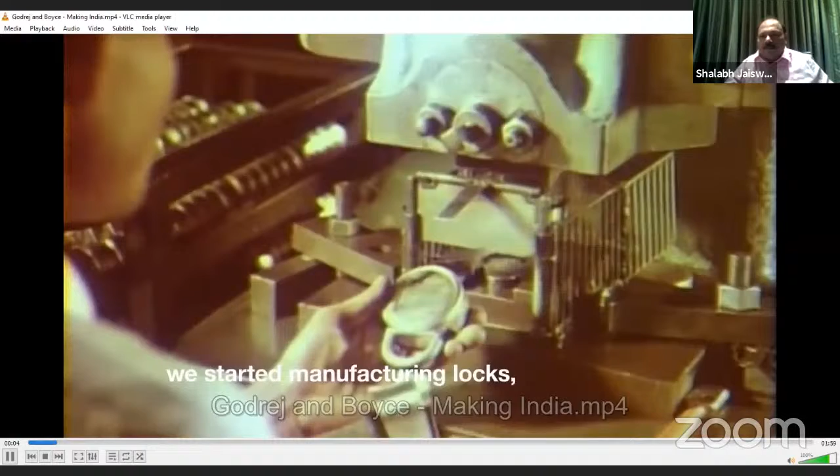In 1897, we started manufacturing locks. We weren't just making in India. We were envisioning a self-reliant India.

When in 1920, we manufactured soap from vegetable oil, we weren't just making in India. We were showing the world a humane way to meet human needs.

When in 1951, we built India's first ballot boxes, we weren't just making in India. We were partaking in India's journey towards becoming the world's largest democracy.

When in 1955, we made India's first typewriters, we weren't just making in India. We were contributing to the nation's mission of propelling women into the workforce.

When in 1958, we made refrigerators, we weren't just making in India. We were supporting the movement of freeing women from the kitchen.

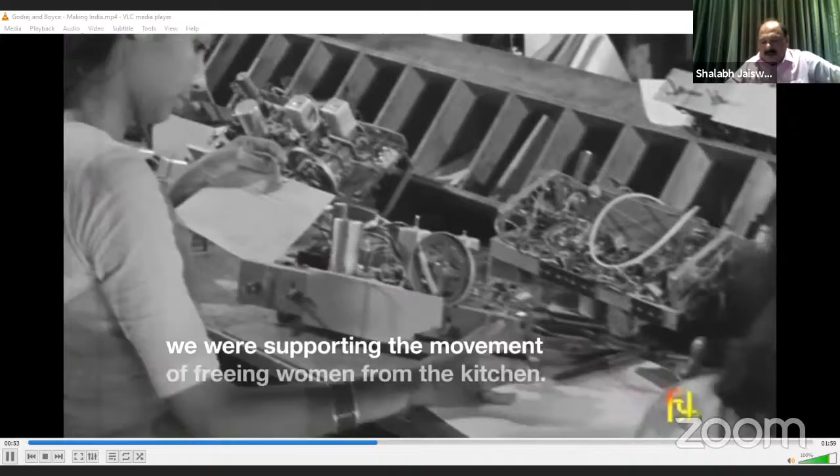When in 1984, we introduced mosquito repellent mats, we weren't just making in India. We were contributing towards making India free from vector-borne diseases.

When in 1991, we started making products that sustainably increased crop yields, we weren't just making in India. We were doing our bit to help farmers double their income.

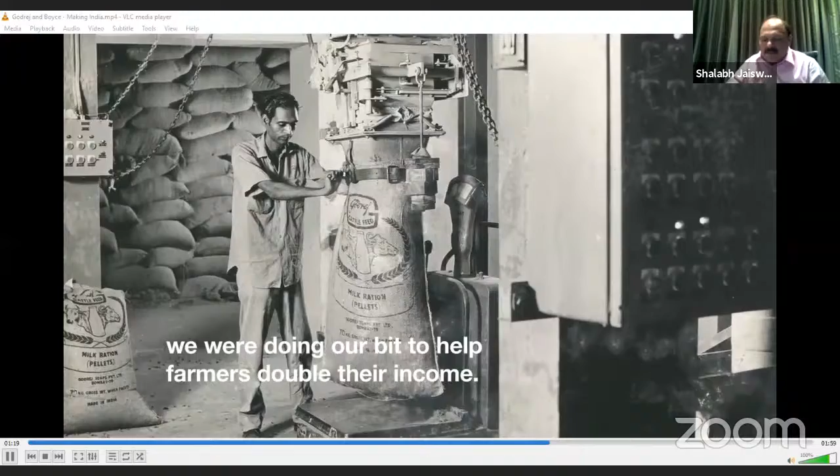When in 2013, we made key components for India's first Mars mission, we weren't just making in India. We were participating in Free India's most glorious moment.

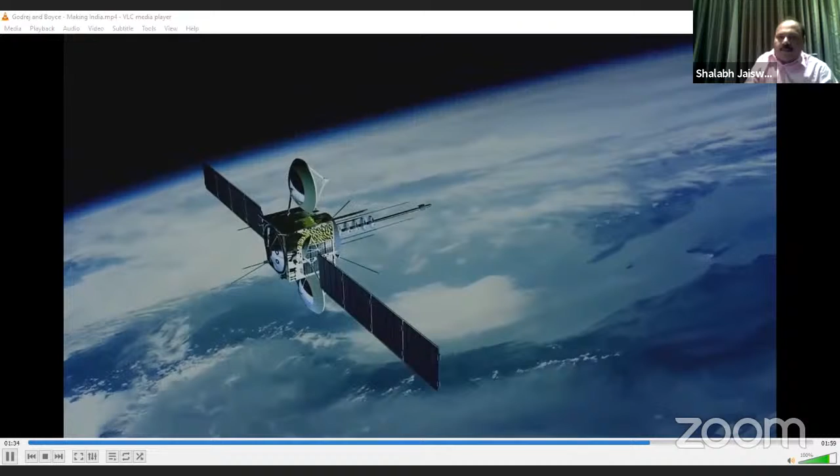For over 120 years, during the journey of our nation's independence, we haven't just been making in India. We have been passionately doing our bit towards making India.

The makers of the iconic brand Hindware, known for crafting exceptional bathing experiences and developing contemporary bathroom solutions. Brilloca offers you bathroom solutions that are state-of-the-art and trendsetters. With a combination of unparalleled performance, smart technology and awe-inspiring designs, Hindware Italian collection meets the new age demands of hygiene. With the aesthetic confluences of European brilliance that mesmerizes each distinction, Queo stands out for you. A design flow articulated for a sense of exclusivity.

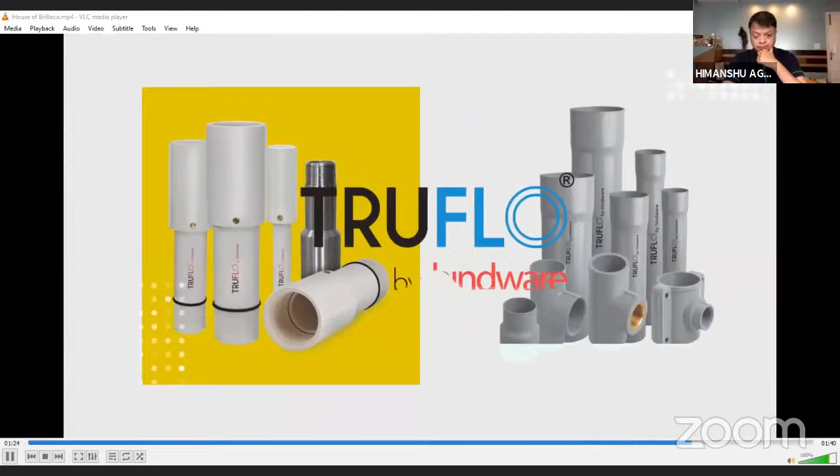That's alchemy. Opening new horizons in the space of tiles. Our avant-garde, futuristic brand Neom. Designed for aesthetics, functionality and durability, Benelave is the segment leader. There's Truflo plastic pipes and fittings to provide complete plumbing solutions.

We at Brilloca are constantly looking at the future and hence are committed to environment and sustainability. Brilloca, new name, same values.

As far as low VOC paint is concerned, how it has enhanced indoor air quality is the main topic to be discussed today. Before that, I'd like to share that our company is IGBC certified, ISO certified, and also holds CIDC and GRIHA certifications.

Before we discuss the benefits of low VOC paint regarding green home builders, as per the IGBC objective, it's important for builders and homeowners to understand exactly what VOC is.

VOCs are volatile organic compounds - unstable carbon-containing compounds that can easily vaporize. Once they enter the air, they react with other elements and lead to pollution. Breathing this polluted air can cause headaches, breathing problems, burning or watery eyes, nausea, asthma, and even cancer.

The EPA, the Environmental Protection Agency, has set some norms and limits on VOC levels, but the acceptable level can still be very high in some paints. VOC levels are highest during painting - the painter is the most affected person and needs to be protected by using low VOC paint. Even after the paint dries, high VOC content can continue to release toxins for several years.

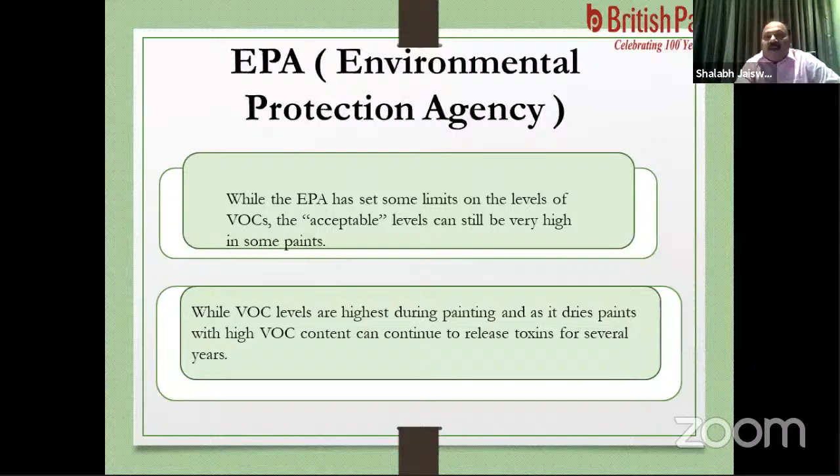This doesn't mean we shouldn't use paint - we all need to be concerned about using good quality paint with natural ingredients. If we go back 30 years, to our childhood in the 80s, people were using lime and cement paint - natural paints with no chemicals. But now the system and tradition has changed, and people are going for better quality, chemical-based paints.

These water-based natural paints give off almost no smell. They were made from natural raw ingredients such as water, beeswax, plant oils, resins, plant dyes, essential oils, and natural elements like clay, chalk, and talcum. That was the old tradition - there was no VOC, and it was very helpful. But as advancement has taken place, things are changing now, and we need to start taking these precautions.

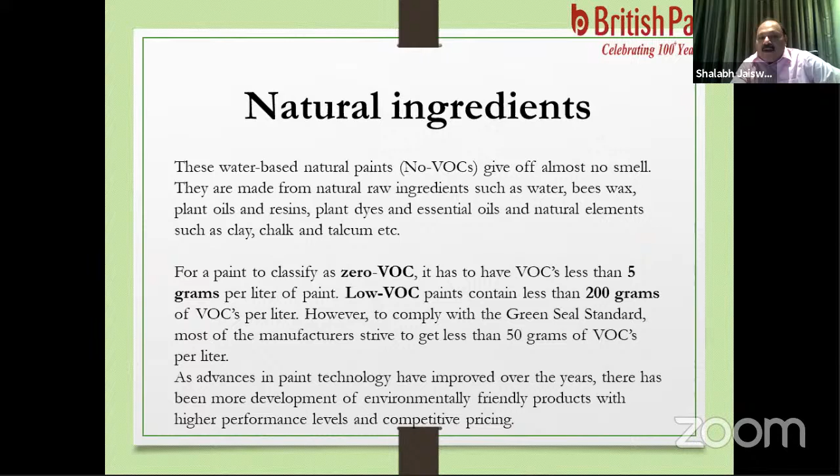As advances in paint technology have improved over the years, there has been more development of environmentally friendly products with higher performance levels and competitive pricing.

What is the psychology like? Normally consumers think once we are using low VOC paint, would it be costly? It is not like that. Low and zero VOC paints have come down in cost gradually over a period of time. Now the manufacturers, it is not very costly. It is reasonable because there are different categories like economy segment, medium segment, premium and ultra premium segments. So in all the emulsion segments, the company has started taking care of these VOC parameters. So people should not think that it would be a costly product. As for price and performance compared to the traditional one, it is okay.

Now, if we talk about eco-friendly, as Mala ma'am already told, air quality needs to be taken care of - how we can contribute. So for a more eco-friendly option, we can use low VOC paint, which is not only beneficial to the environment but definitely for your health also.

In buildings that especially need to maintain good air quality, like schools and hospitals - definitely in schools there are small kids, and in hospitals there are patients. So we definitely need to take care in those particular areas. It is crucial to use the most health and environmentally friendly paint, as indoor VOC has higher levels.

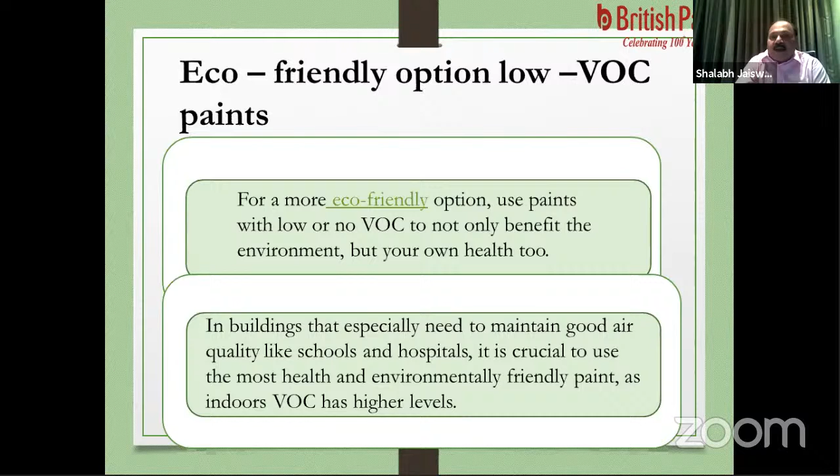There are definitely various other benefits also of using low VOC paint. Once you're using low VOC paint, it helps reduce the allergy causing toxins. It helps reduce the concentration of contaminants in the ozone layer as well as in ground water and landfills.

It is easier to clean with soap and water than other paints. For a common consumer, a lady definitely believes in maintaining her house. So once you're using emulsion paints and low VOC paints, it is easy - you can clean the wall very clearly with the help of a small, light detergent.

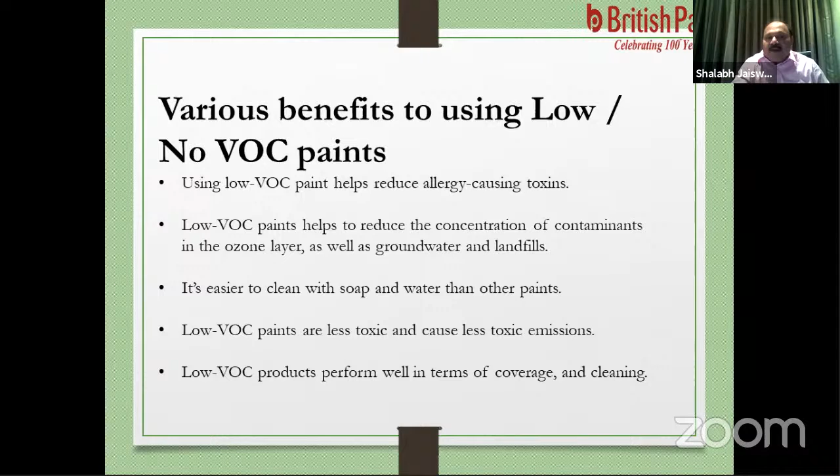As for other benefits of low VOC, these paints are less toxic and cause less toxic emissions. And definitely the coverage and cleaning also comes better. Coverage doesn't necessarily increase, but you will get reasonable coverage.

Cleaner air - if you use low VOC paint throughout your house, you won't have to worry about inhaling dangerous fumes during or after the painting process. Because after painting, you definitely have to live in the home, but during painting, the painter is the main person who is directly in touch with the paint, and during the painting process the emanation takes place. So from the applicator and painter's point of view, it is important.

Keep in mind that paints which release higher levels of VOC can cause a variety of health issues, spanning from aggravating allergies to causing permanent respiratory issues.

There was a builder in St. Louis who started as a green home builder - this is something they worked hard to eliminate in the homes they build. It means it is a kind of social service - to make a green building is a social service. We can say we are concerned towards society and towards the nation.

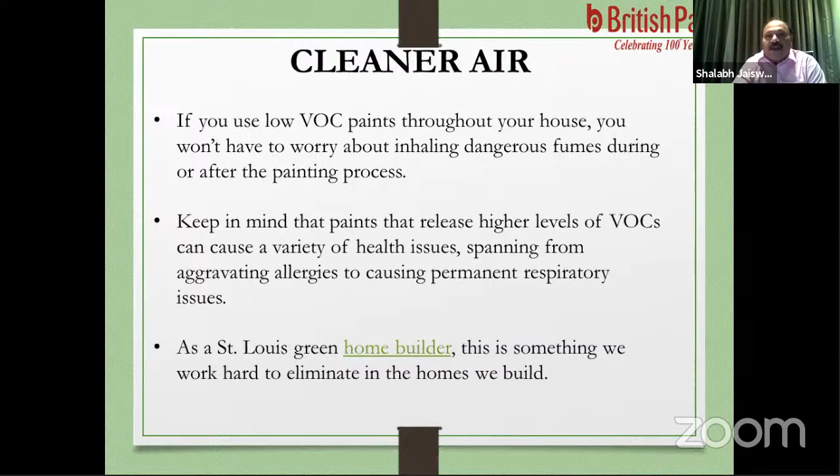Strong odors is also a matter. After painting and during the painting, the odors is also one of the factors which need to be taken care of. Low VOC paints help in that. Whether you are painting your luxury home yourself or having your green home builder, take care of it. The odor of paint can be quite an obstacle. Paint does not always dry quickly, and the chemical scent of paint containing high levels of VOC can prevent you from getting back into your home. With low VOC paints, the painting process is safer and you will be able to get back into your home quicker because the air will not be polluted with strong odors.

It is cost effective, as I told. It is a common misconception that low VOC paint will be far more expensive than the hazardous alternatives, but it is simply not true. Low VOC paints are very similar in price and can be found at your neighborhood hardware stores. You can pay comparable price for the safer paint, which means more money to spend on personal touches in your luxury homes.

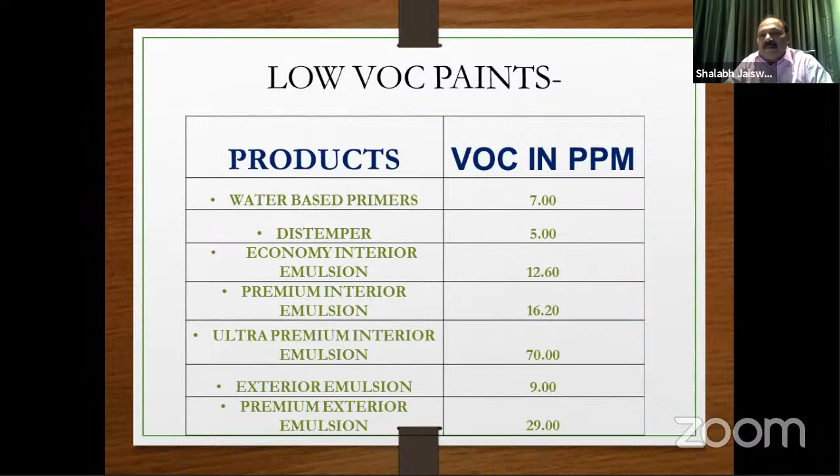Hi, good morning, and thank you, Mr. Jaiswal. It was really good to know that low VOC really helps in IAQ. But now pre-COVID times and post-COVID times have seen a great lot of difference. I was surprised to know that indoor air quality is 5 times more polluted than outdoor. So if Delhi is today talking about outdoor air quality being bad, just think about it, indoor air quality is 5 times more bad.

So let's hear it from one of the best possible persons, who is part of a company which is probably one of the largest air filter suppliers in the world, and they're into air cleaning and air filters. So whether it is HEPA or MERV 13, or what kind of filters we should look for, probably at least for metros and mini metros in India.

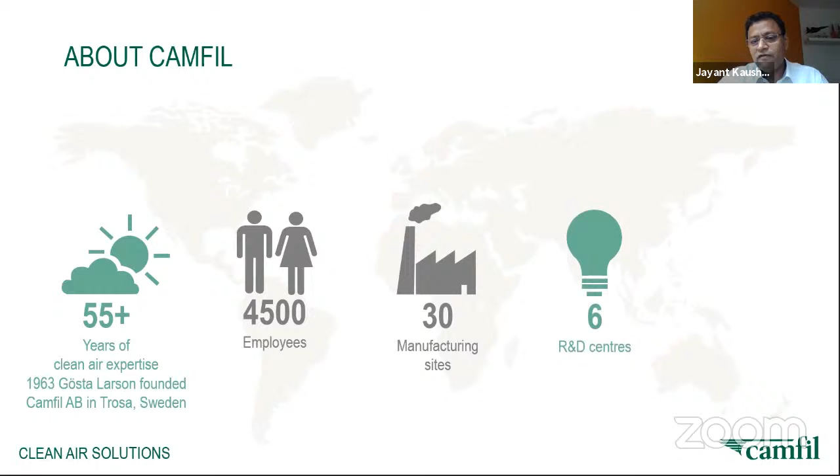We are not many employees, 4,500 globally, 30 manufacturing sites, 6 R&D centers, and we are coming from headquarters in Sweden, in Stockholm.

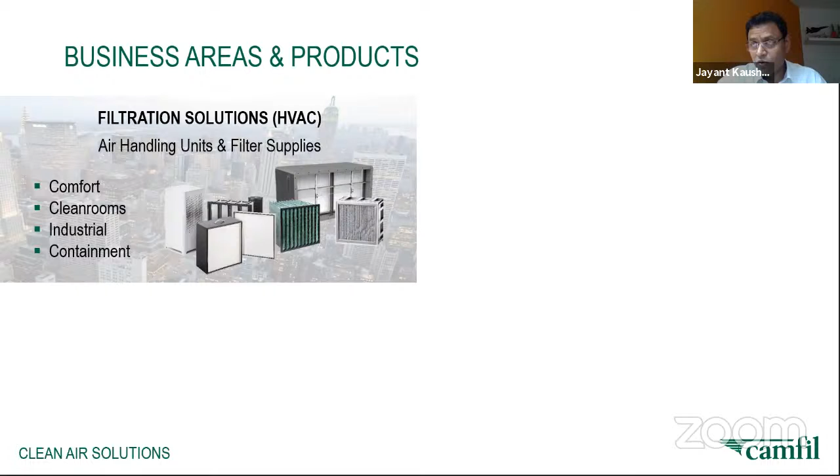In terms of business area, we have 4 business areas. In terms of filtration, we have filters for all kinds of air handling units, whether it is public building, comfort, clean room application, industrial application, or even containment. Containment means for places where you have to contain the gases from going out and you need to filter them.

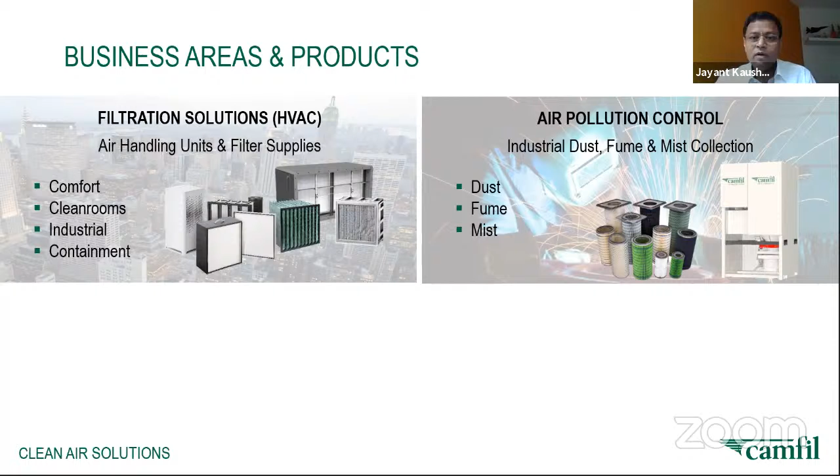Then you have something known as air pollution control, which is basically to take out the dust, fumes, and mist from an industrial application. So wherever you are creating a high degree of pollution while manufacturing, this is something which can collect the dust, take it out from the area where people are working, and separately accumulate it, and then it can be disposed of easily.

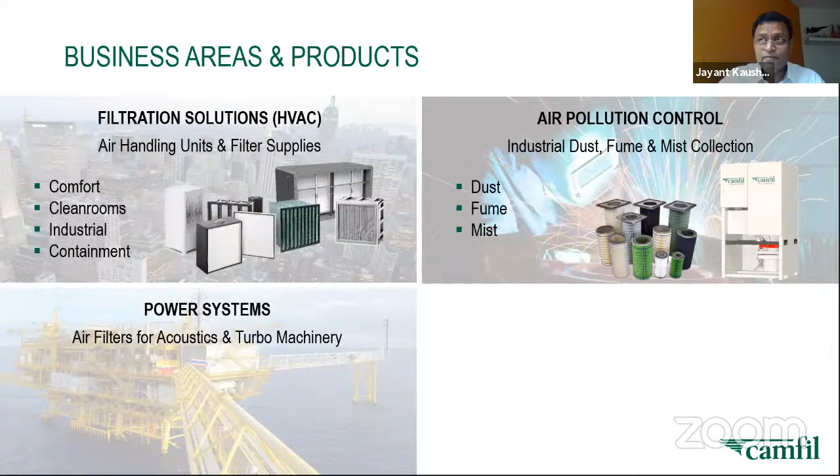Number 3 is power system, which is basically we make filtration for gas turbine units, so that the gas turbine unit can supply you energy at lower cost of ownership and without much disturbance in terms of frequent changes of filters or shutdown.

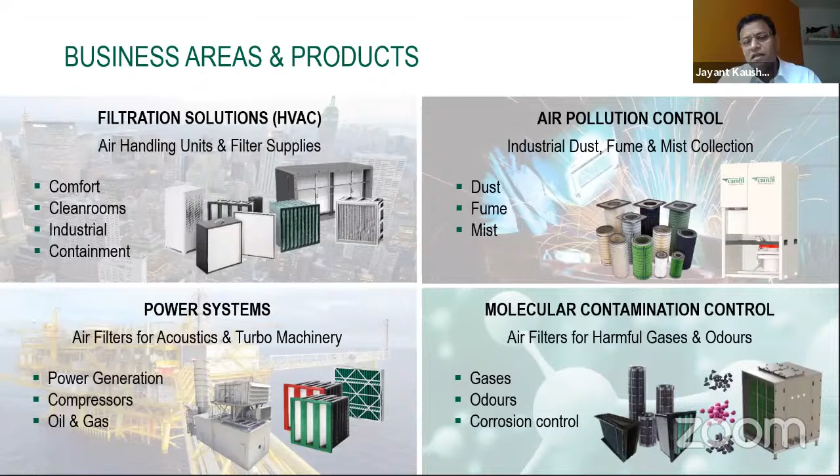Last but not the least, as touched upon by Mr. Jaiswal, is about molecular contamination. So we do have filtration which can take care of gases, odors, and corrosion controls. Gases mean NO2, SO2, VOC, formaldehyde, including ozone. So this covers the entire gamut of business, what we do globally.

Moving on to why we're talking about PM1 and not PM2.5. Let's understand this: the air we breathe is about, in reference to 1 kg of food we eat and 2 kg of liquid we drink, 15 kg of air we breathe. So it's much more.

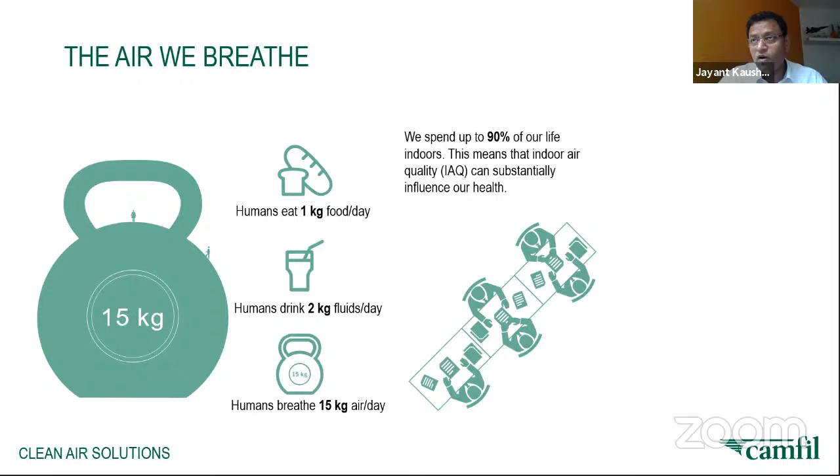15 kg is for a normal person who is normally walking. If you're running, or workers doing something very heavy, they obviously consume more. We spend about up to 90% of our time indoors, which means sitting in an office or home and breathing air which is possibly more polluted.

We all think that outdoor air is more polluted, but as per studies published by WHO, indoor air can be much more polluted—up to 50 times more polluted inside. That's why it is important to clean the indoor air.

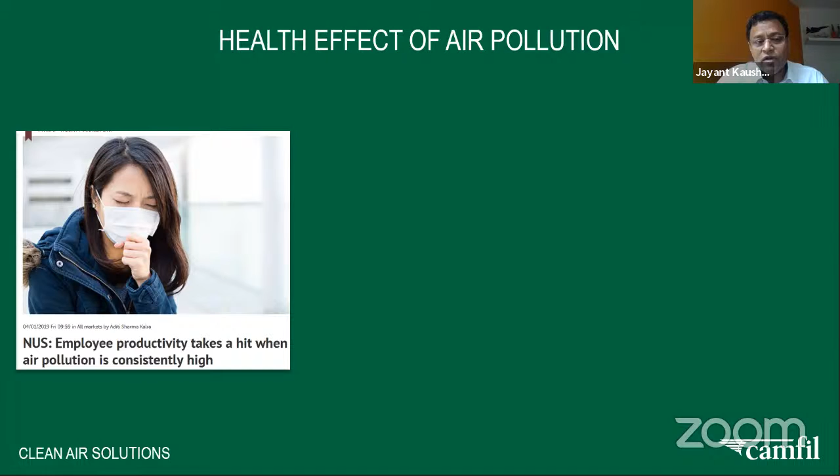Moving on to a few snippets on what is happening: a study done by the National University of Singapore says employee productivity takes a hit when air pollution is at a higher level. In China, a link between happiness and air quality has been established, meaning if pollution is at a high level, people feel they're not very happy.

A similar study done in the UK says when NO2, nitrogen dioxide, is high, people feel something is very disturbing—for example, feeling as if a partner is dying. That's the kind of sentiment one gets.

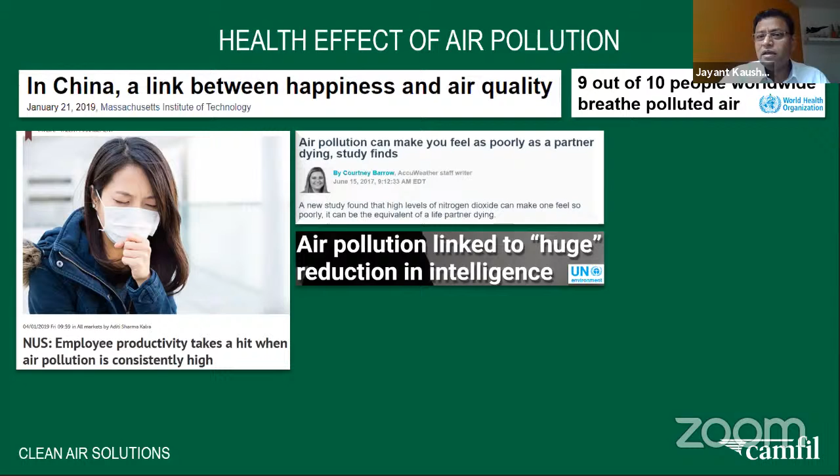Air pollution is linked to a huge reduction in intelligence. So air pollution is not only affecting our respiratory system, it goes beyond that—taking a hit on intelligence, breathing issues, and even baldness linked to particulate pollution levels, as per Sky News. So it extends to various levels.

1 in every 8 persons has a respiratory problem. Last but not the least, a recent Harvard national study established that long-term exposure to air pollution can lead to a higher mortality rate under COVID. They say an increase of 1 microgram per cubic meter can cause about 8% more deaths. This means, whether COVID or not, pollution is affecting our life somewhere.

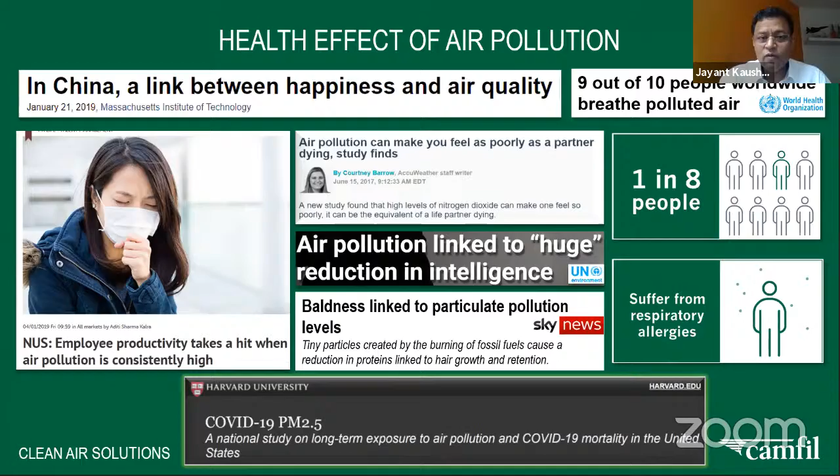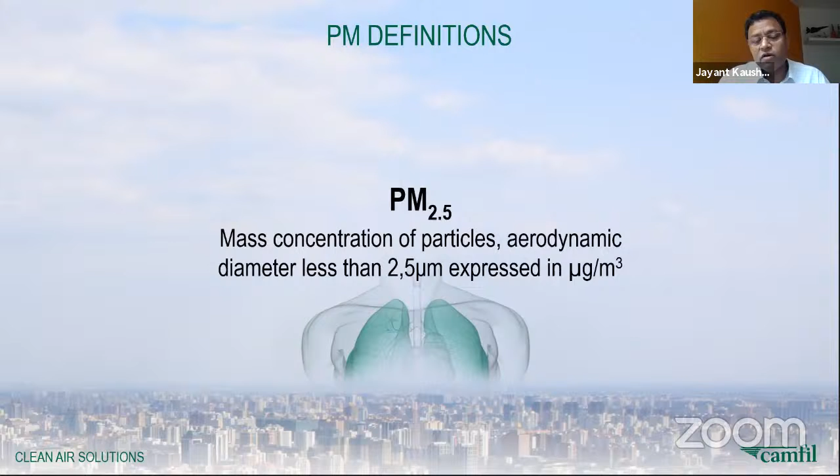A quick definition of what we call PM, particulate matter: PM10 means particle matter with a diameter of 10 microns, expressed in mass as micrograms per cubic meter. PM2.5 is similar, with a diameter of 2.5 microns. Similarly, PM1 has a particle diameter of about 1 micron, which is basically a subset of PM2.5 particles.

So where is this coming from? They're coming from various studies.

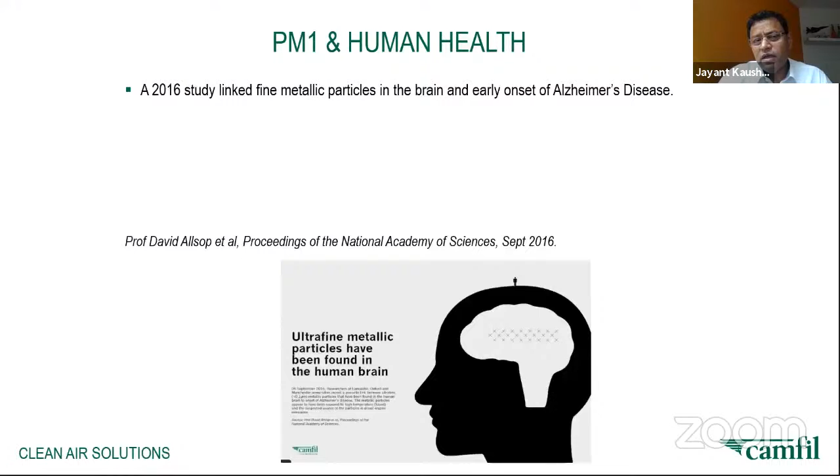This is one study done in the UK, where in 2016 it was established that fine metal particles in the brain were found at the onset of Alzheimer's disease in patients. Scientists were surprised to see how a metal compressed particle can be found in the brain of a human body, and how it reached there.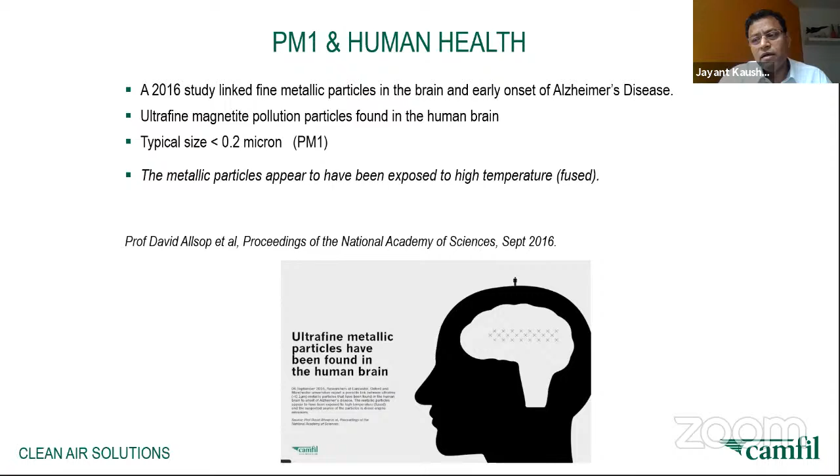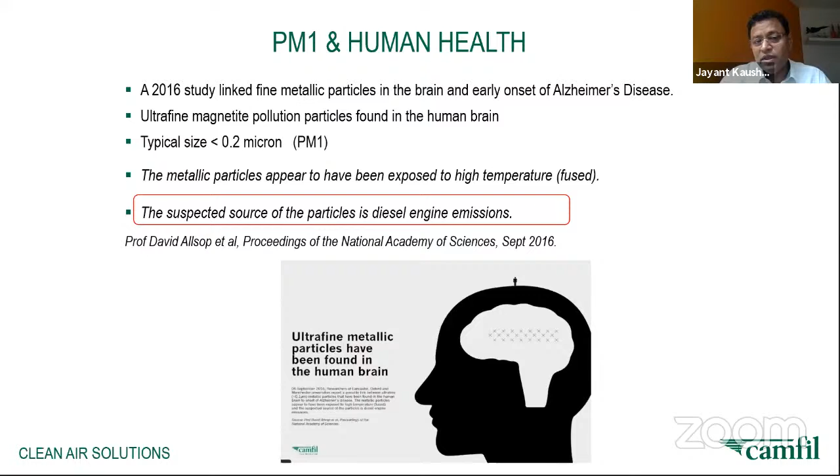They all came to a conclusion, possibly that it is coming from diesel engine exhaust or emission, where the particles are much finer and are compressed metal particles, which can actually go into levels where nobody expected them to be.

Now, these are a few findings from a health study in China, which basically establish the fact that PM1, smaller particles, is more dangerous than bigger particles. One study says that PM1 air pollution is linked to cardiovascular disease prevalence.

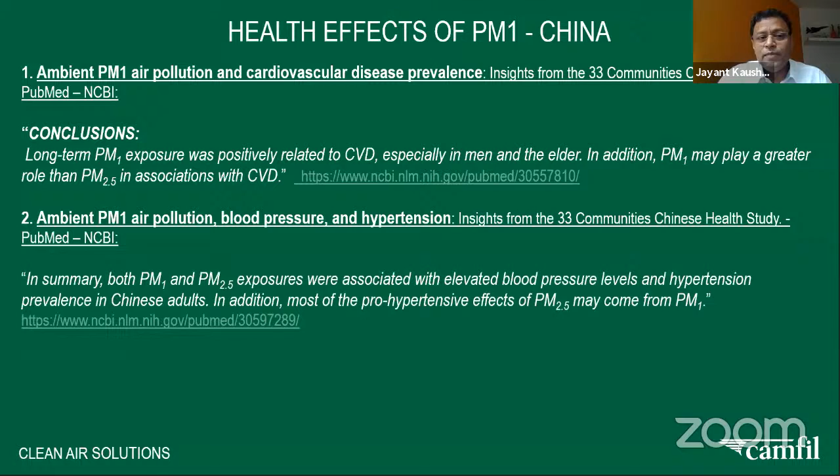PM1 air pollution also creates blood pressure and hypertension issues, and scientists are saying it is possibly coming from smaller particles, not the bigger particles. They have noticed that when air pollution goes up and PM1 for sure goes up in terms of number, they see the effect in the number of patients and people visiting clinics.

That's how the scientist community came to say we have an issue with smaller particles, not necessarily bigger particles. I'm not saying we ignore the bigger particles—what I'm saying is we have to take care of the smaller particles first, then the bigger particles.

This picture on the left-hand side shows that when the particle size is PM10 micron, we have a natural defense system which takes care of it—the upper respiratory tract, where we cough and sneeze and it comes out easily. When the particle becomes smaller, it goes deeper and deeper.

For example, this fourth picture shows that particles less than 0.1 micron can go into the entire bloodstream, and below that, they can go into the entire body.

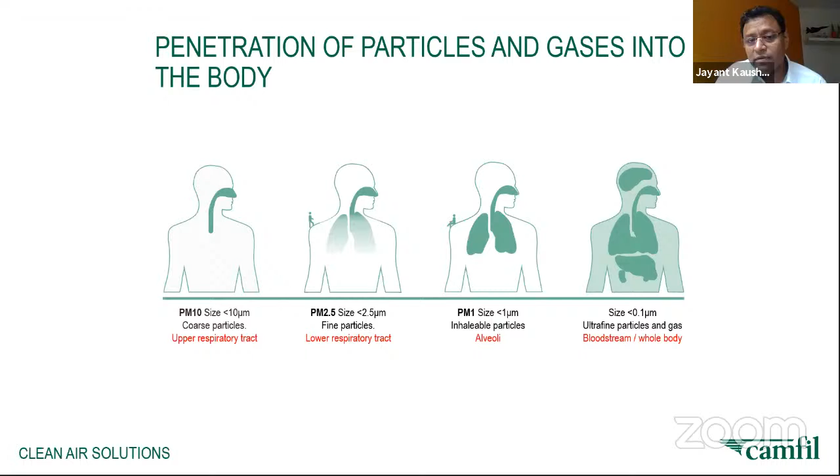Considering all this, let's understand when we have to filter these kinds of particles, what kind of filtration we need. So we need to understand the air filtration principle.

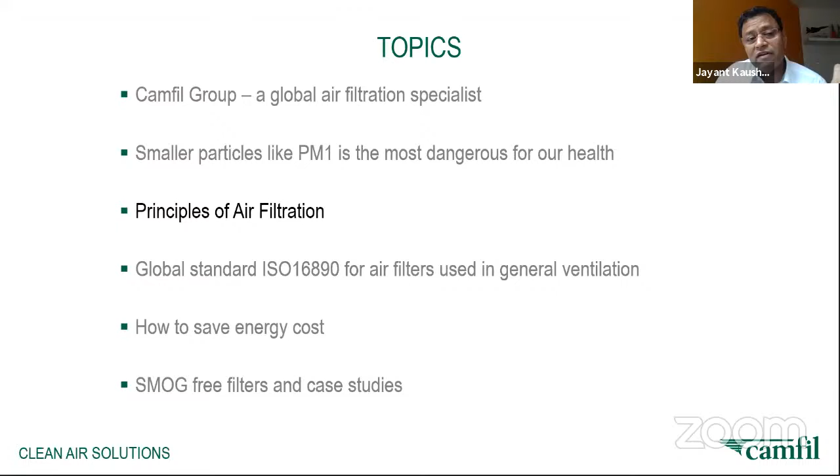Quickly, I will tell you that 1% of number which has a 1 microparticle is equal to 1 million particles of 0.6 micron, and 1 billion nanoparticles of 0.06 micron.

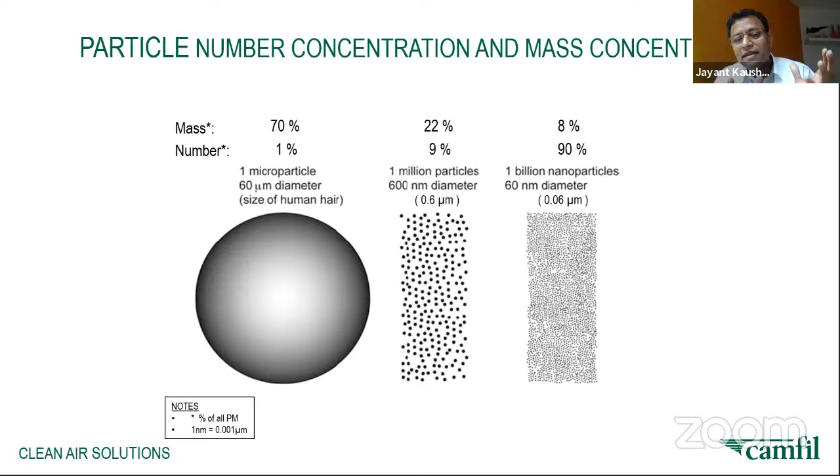Which means if you take a reference of human hair, which is about 60 or 70 microns—the extreme left-hand side can be the diameter of a human hair—you see that a hair's diameter worth of space can contain so many particles of smaller size, which is what's affecting our health.

Moving on, this is a quick reference in terms of PM1 and PM2.5.

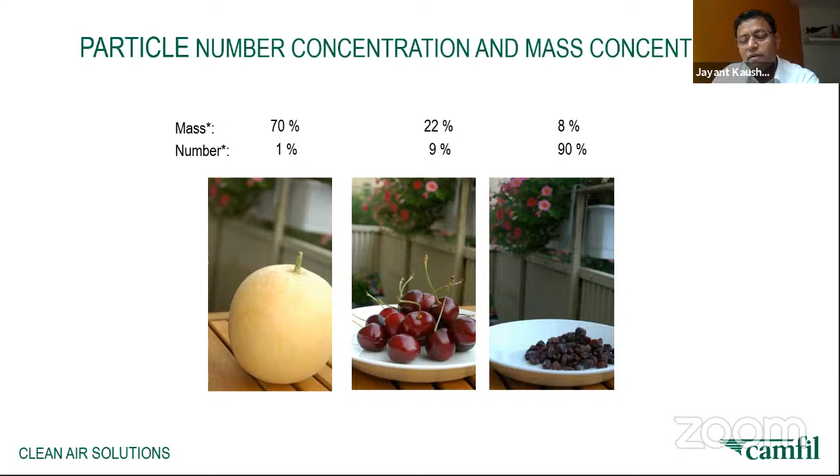Now, if we have to filter these, we need a material, which we call media, that can filter this air. There are typically three types of media: glass fiber, synthetic, and electrostatic.

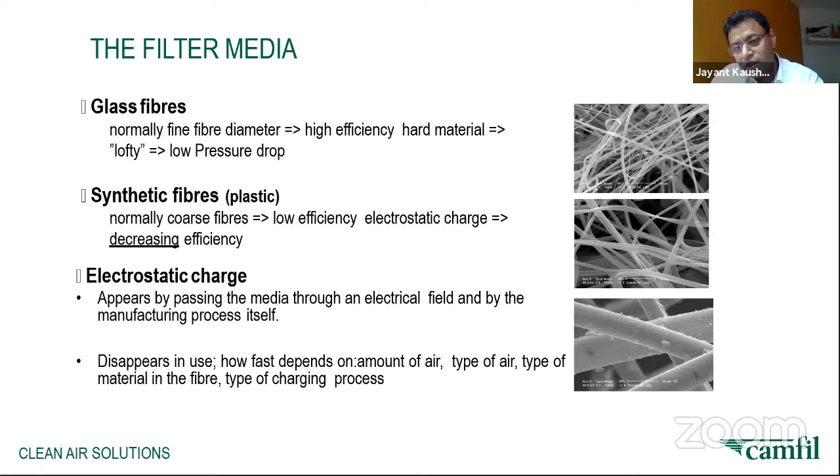On the right-hand side, you see a picture magnified about 500 times to see much deeper how the fibers are actually constructed. You'll notice that glass fiber has many fibers which have the ability to stop or filter smaller particles, considering the one which is much lower, known as electrostatic charge—I'll come to that.

Let's take an example. If you combine the principles of filtration theory, you will see impaction, straining, and sedimentation are effects that take place on the filter material.

So the graph will look like this: on the extreme right-hand side, the blue line takes care of bigger particles, the black one can take care of smaller particles, and the red one can take care of much smaller particles.

What happens between 0.1 and 0.2 micron? Between 0.1 and 0.2 micron, particles have a tendency to bypass all the filtration as a general filtration phenomenon. What we need here is a HEPA filter kind of thing.

I won't get into detail, but just to tell you, this is how filtration works, and the green line shows the total efficiency of any filter.

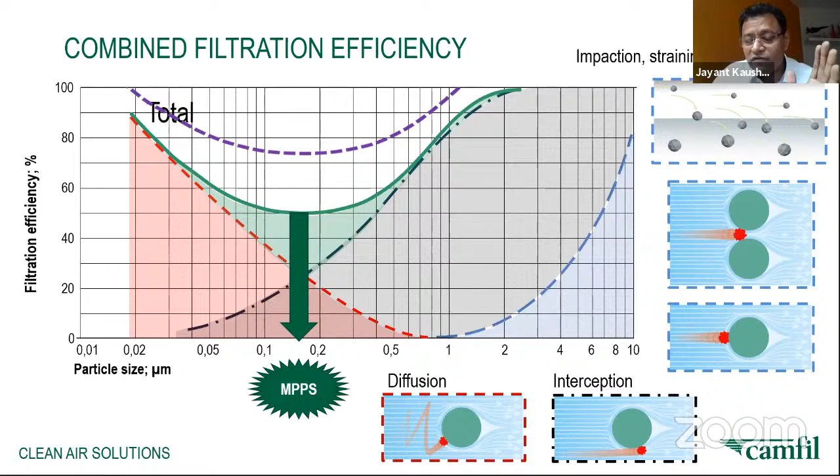Let's talk about this purple color line, which is known as the electrostatically charged filter. These are filters which can be charged and have very high efficiency, but after a month or two, the efficiency drops.

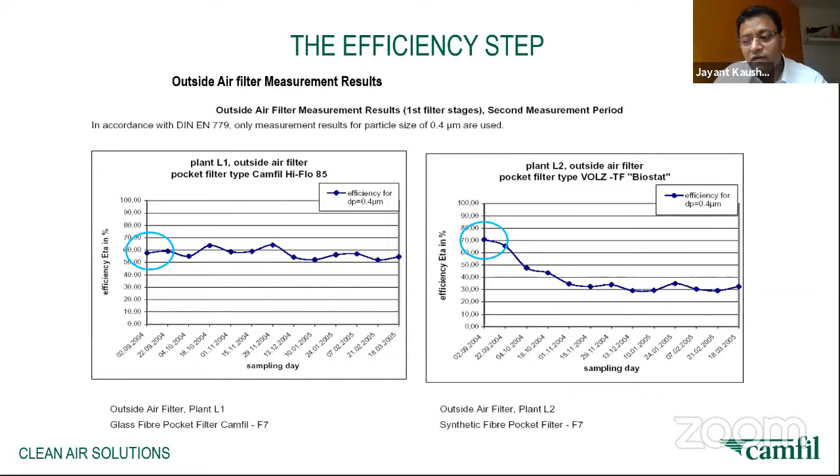To prove my point, I'll go to this slide on the left-hand side there's a graph. We took an identical air handling unit and put the same type of filter on both sides. On one side we put a glass fiber filter, on the right-hand side a synthetic filter. After 2 or 3 months, the efficiency on the right-hand side filter drops to a much lower level, about two levels of efficiency.

That's the important point. Then the question is, how do we know which filter we are buying, because it's so confusing in the market. That's why the community came up with a new standard, launched in 2016, to establish filtration for a common understanding. Now if somebody wants to know what filter is used in a building, they won't understand the language because it's hidden in jargon like MERV and F. Now this is very clear.

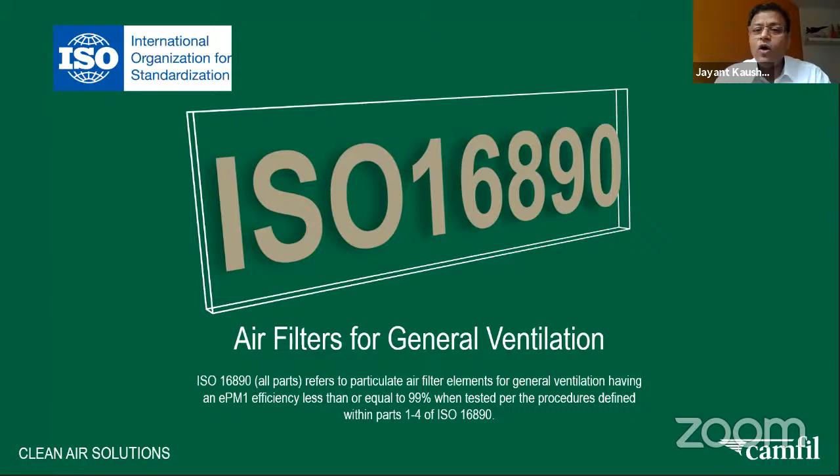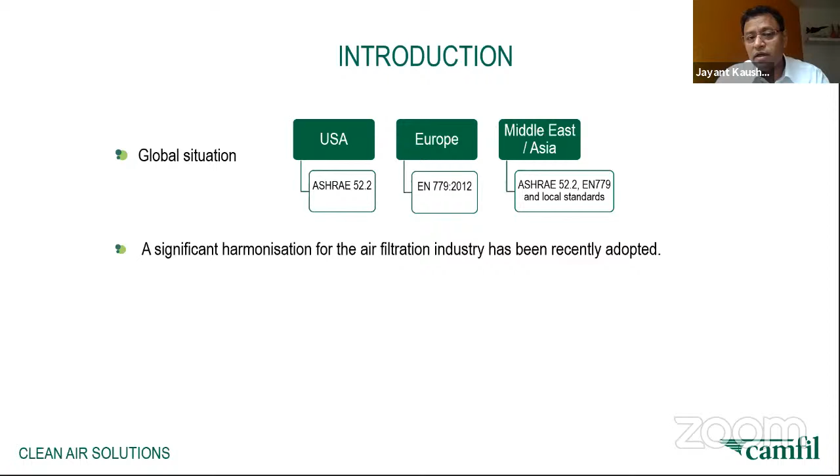It defines a filter in basically four ways: either it's a PM1 filter, PM2.5 filter, PM10 filter, or a coarse filter. That's how the standard came into effect, already used in many countries, with some adopting it as a national standard. It's available in Europe, and all European standards have changed to ISO. This is just to have a common understanding globally. In the Middle East and Asia, we use both systems. This is to harmonize and have one level of understanding of filtration so people know what they're using.

So what is the best part of this? It has 5 benefits of having one global standard. It's a new common standard that eliminates confusion, encourages global trade, and has a defined minimum efficiency. A filter has to have at least 50% efficiency after discharging to claim that efficiency, meaning it will filter at least 50% of particles, whether PM10, PM2.5, or PM1. That's the benefit of it.

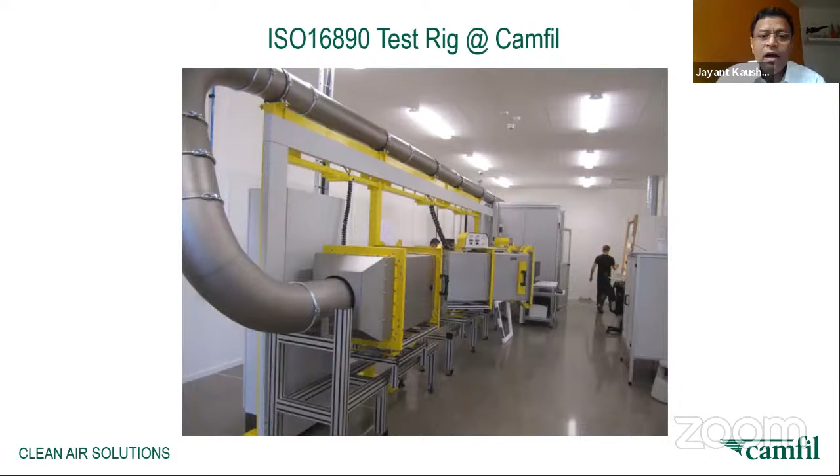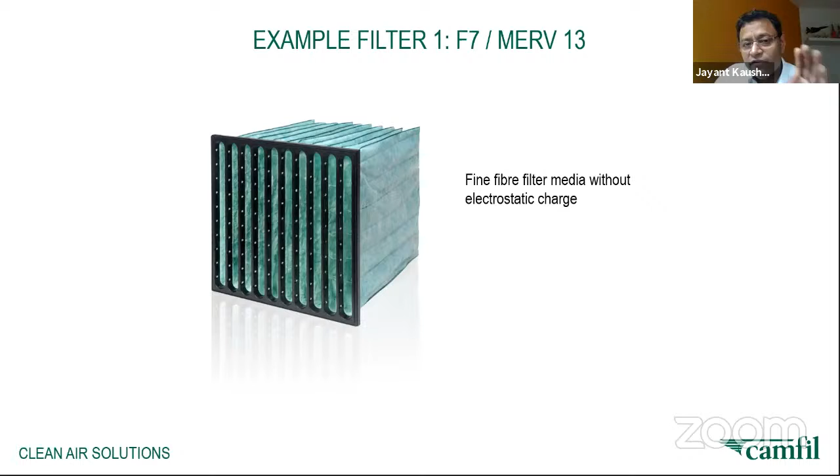This filter is typically made of glass fiber media, the same material shown in the earlier picture. If you test it at various efficiencies, this is what you'll notice: efficiency on PM1 is 64%, followed by 74% for PM2.5. When you discharge the filter, meaning you take out the charge from the material—like normal plastic or synthetic filters have charge—it becomes a discharge efficiency. You take the average of both and claim that as the efficiency.

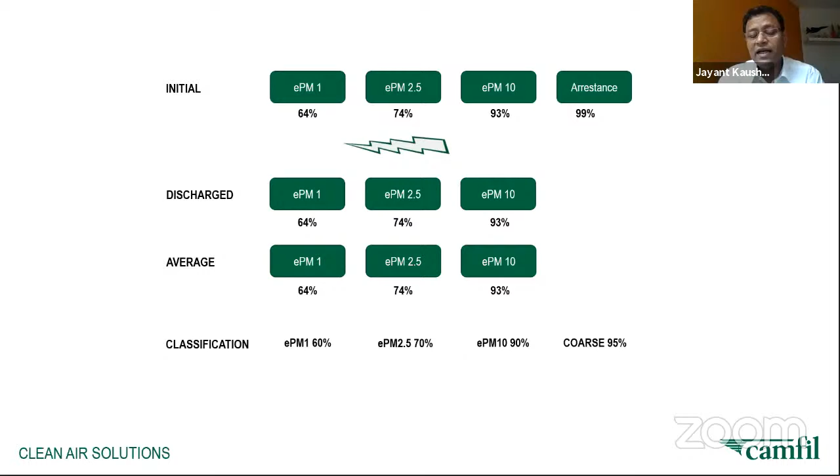Now that's very important for people to understand. Otherwise, as a customer, as a layman, we don't know, and what happens? We just leave it, give it to somebody, and move on. What can we do about this? If people understand it, it possibly helps them ask for it and say, why don't we use this kind of filter? So we classify it as PM1, 60% efficiency.

Taking a similar example on an electrostatic charge filter medium, which is basically a material made of synthetic fiber.

We need to wrap up in another 2-3 minutes, so that'll be fine. Sorry, I can't hear you, say again. Can we wrap it up in the next 2-3 minutes for the paucity of time? I appreciate that, sure, I understand. So give me 2 minutes, please.

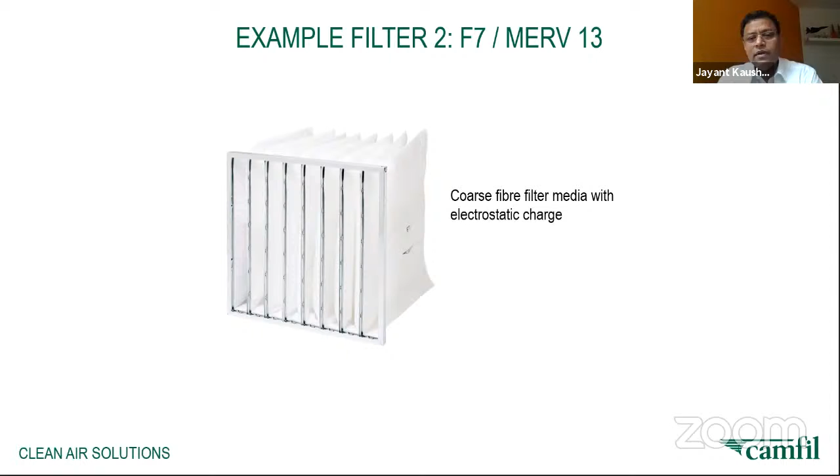I'll cover this. The same example applies: when you discharge the efficiency, it cannot be claimed as 60% ePM1. So this is how a sample test report looks like. This is how you claim 60% efficiency.

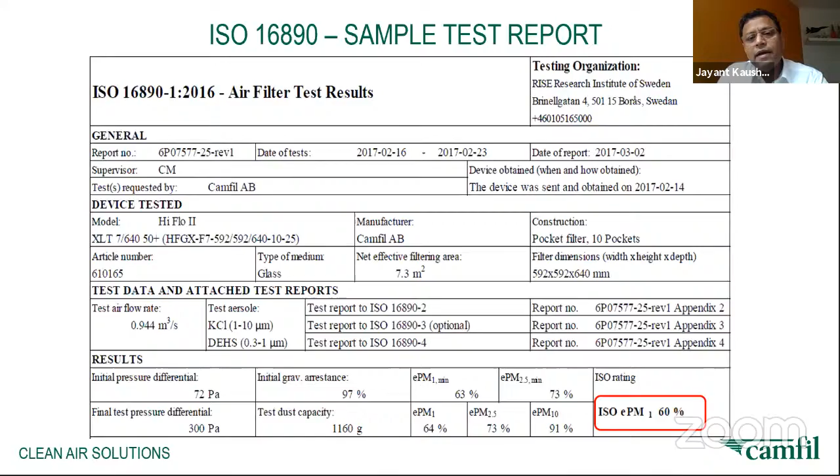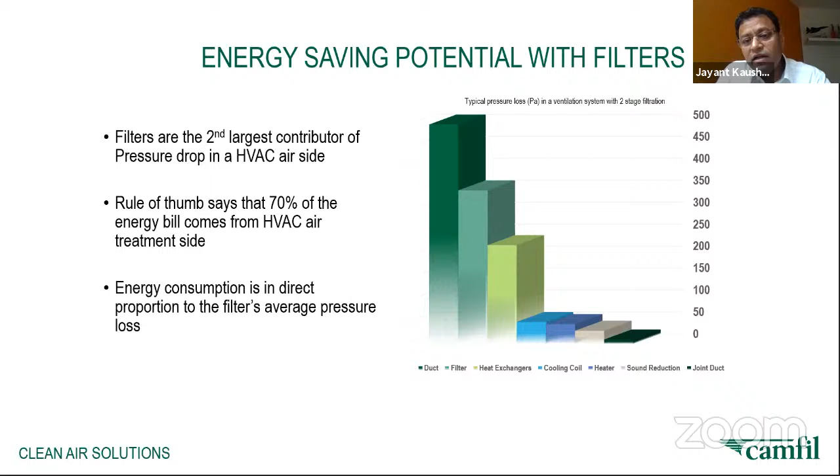And then what is important is energy efficiency. I won't spend time on that, but there's a standard known as Eurovent that measures the energy consumption efficiency of the filter. A filter is good when it takes care of indoor air quality but also takes care of energy consumption. We don't have time to go into detail, but this is a standard that's available.

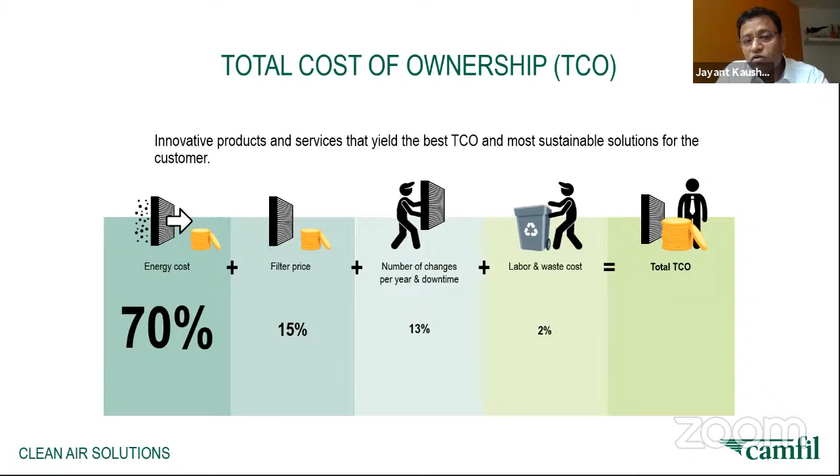This is how we consider total cost of ownership, which means filter cost is one thing, but there are other things adding to the cost in your air handling unit or premises. So we have software that can explain how the life and efficiency of the filter work.

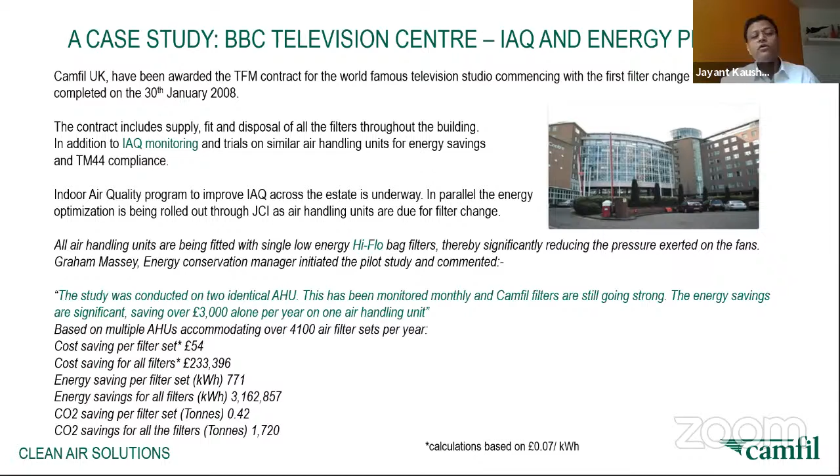This is a case study, the BBC case study done a few years ago. The green line in the middle section shows the study was conducted in two identical AHUs, monitored on a monthly basis. Based on multiple AHUs, the cost saving is huge in terms of filters, 233,000 pounds, plus energy saving and CO2 saving achieved.

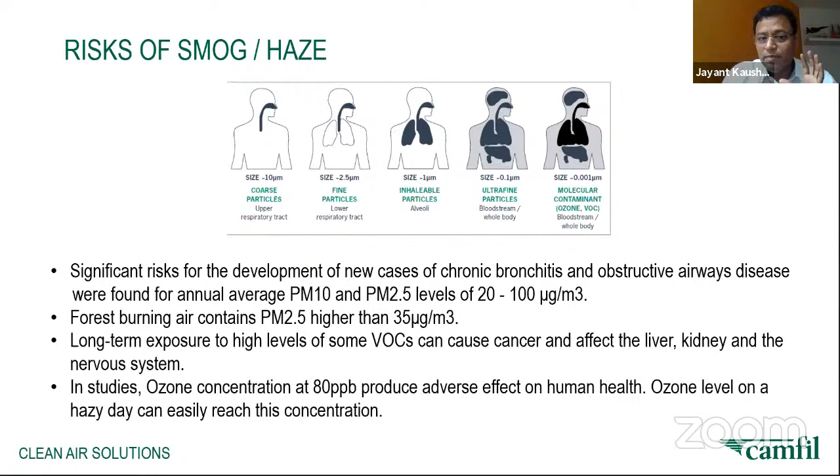We can leave a copy, you guys can go through that later on. This is about smog or haze, VOC or NO2 filtration. There's a possibility to have filters for both particles and VOC and ozone. A list is available here if you have time to go through it.

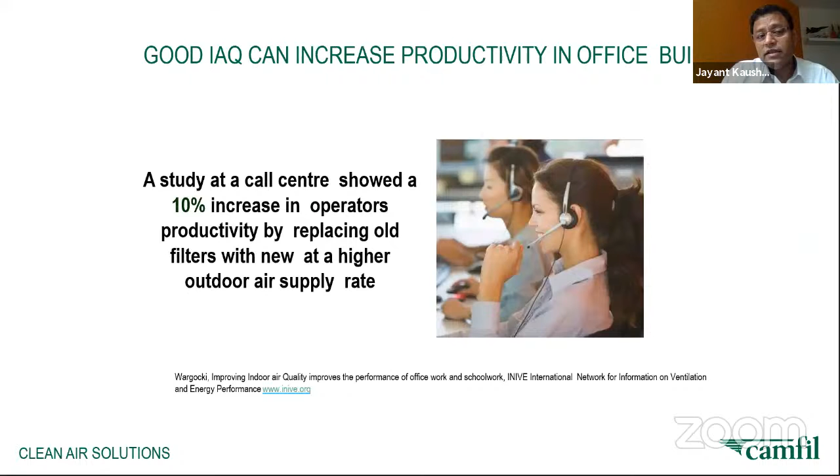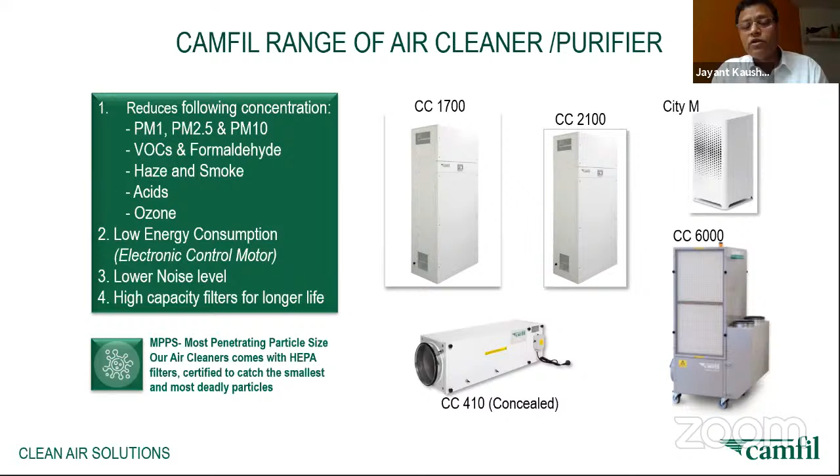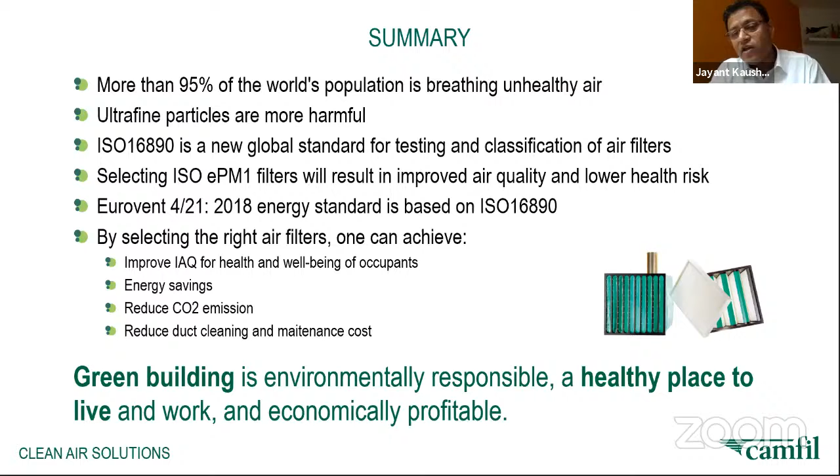Green building to me is environmentally responsible, a healthy place where we can work, and it should be profitable. So green building is not only about saving energy, but also about taking care of particles. Thank you very much for this slide.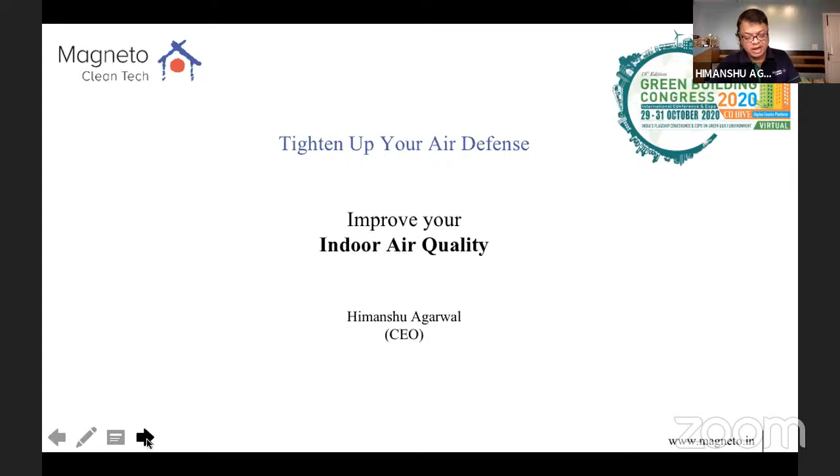My intent here would be to make people aware of the entire concept of indoor air quality. As Mr. Manoj rightly said, and Mala said at the start, in the COVID era, when air conditioning itself is becoming a questionable source of contamination, what is it that we're going to look at as a country and as individuals? So my intent here is to tighten up your air defense by improving your indoor air quality. We all know that beyond just Delhi, air pollution is spreading across the country. We already spent time on it, so I would not like to dwell on that much.

If we look at the overall dynamics of air quality, it's not just the VOCs, it's not just the particles, it's also the microbials. So when we look at it cohesively, we have to look at strategies and possibilities to contain and create safer spaces on all aspects.

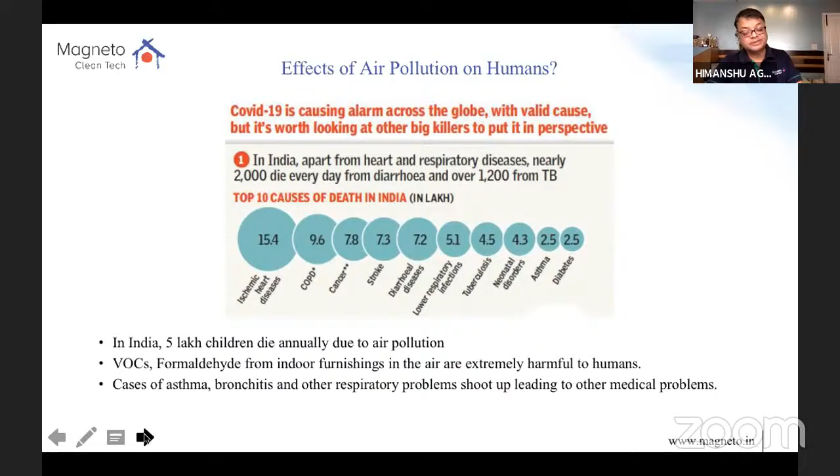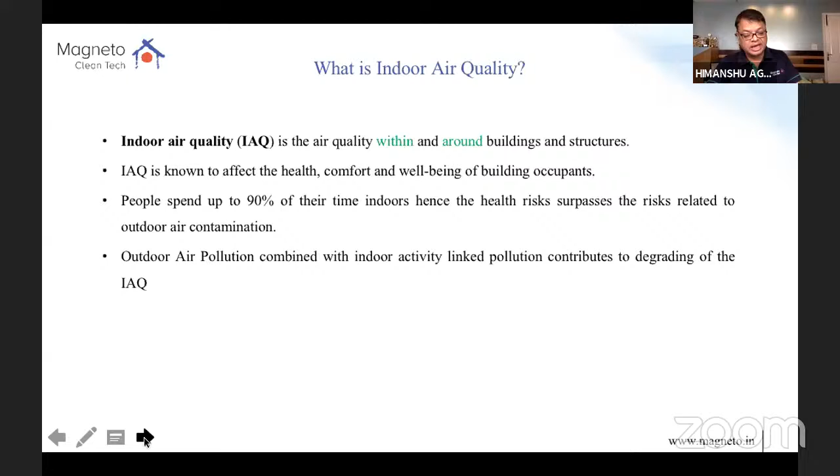So what is indoor air quality? We already know it - the air which is surrounded by outdoor air, now being mixed up inside. 90% of our time is spent indoors, we already know that. And of course, food, water, air - this has already been talked about.

There are a couple of myths I'd like to break. Indoor air is more clean than outdoor air - it's a myth. Indoor air is 15 to 20 times more polluted. Why? Because you are recirculating the air.

I'd like to highlight a phenomenon which emerges in every developing society, and this is something you realize ignorantly. If you look at India in the last 4 years, perfumes and aromas have started to come into our lives. Why? Because your nose is able to recognize there is something called malodor - that means something is not right with the buildings and spaces. But as a society, what do we do? We mask it. So when you go to buildings today - hospitals, hotels, spaces - everybody does that. Even in your own car, even on your own body, you're doing it. But once you become more aware of it, you'll overcome it.

Another question people always ask is, by installing air purification, is my immunity going to go down, just like with water or food? Maybe. But let me tell you, and I leave this question to everyone here - is smoking 5 cigarettes a day better, or smoking 50? I think that would answer it.

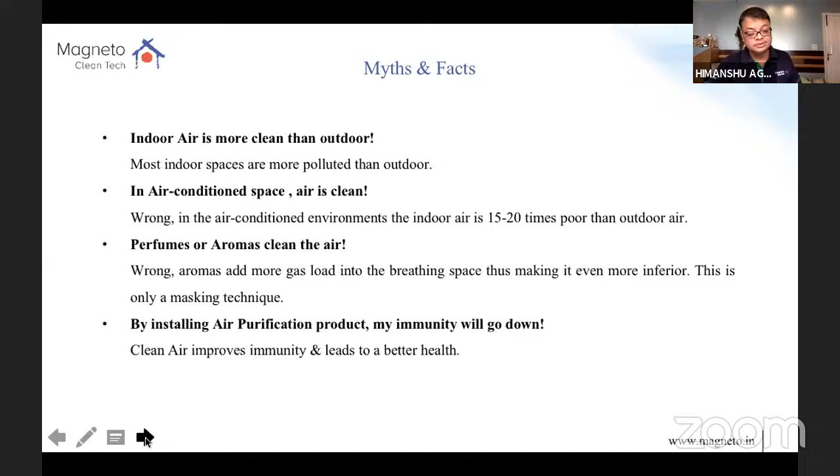Now we have to understand, when we talk about indoor air quality, it has to be seen cohesively on all three aspects. Air is a very complex subject. It's not just particles, it's not just microbials, it's not just gases. A mixture of all three, which are highly volatile in nature, makes up our air. Let's understand a little bit more about each one of them.

As particles, of course, there's dust - PM1, PM2.5, PM10 - as my colleague here, Jen, just said. And of course, dander and pollen, which are also released from the body and from plants and species.

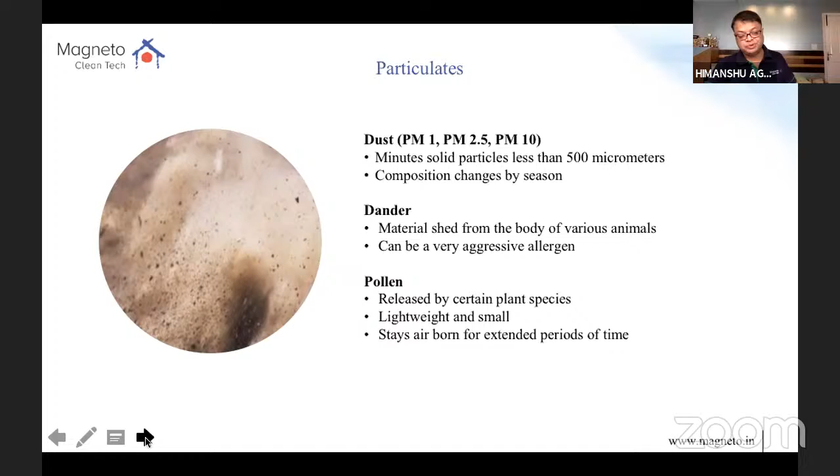Microbials - this is something coming back to us. Bacteria, virus, mold, fungi, and all these kinds of species. Viruses are coming back, and remember one thing - viruses are made up of genetic material and protein. And remember, bacteria are single-cell organisms - they can mutate on their own, while viruses need a host body. Remember this, because as we go along, we'll try to understand how we can decontaminate viruses so easily.

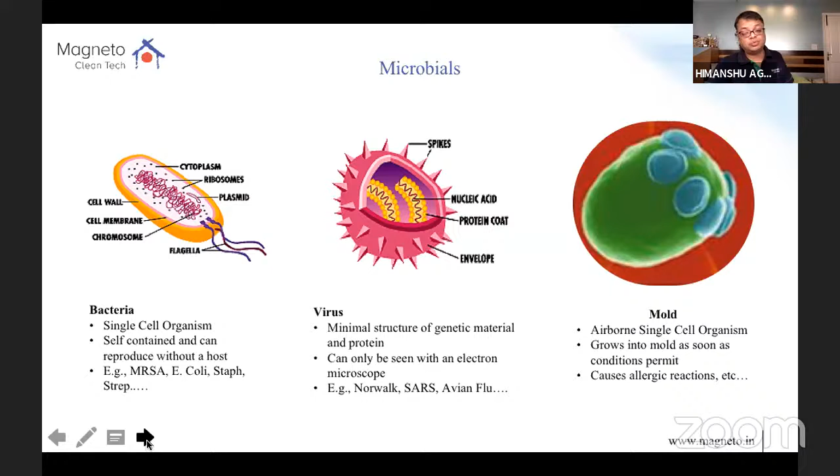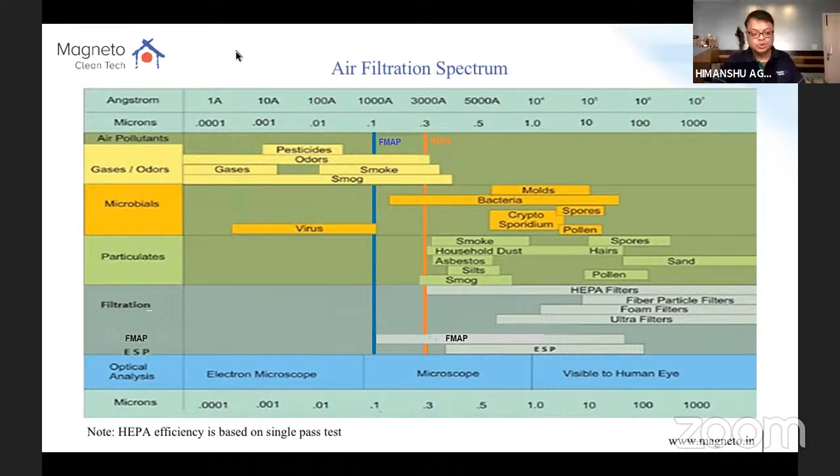If the humidity is higher, you're likely to have more microbial counts indoors. If you have higher CO2, you're going to have higher VOCs as well. One very important point I'd like to highlight here: in isolation, if you see one value, it has no meaning. It is value plus exposure that gives you your dosage.

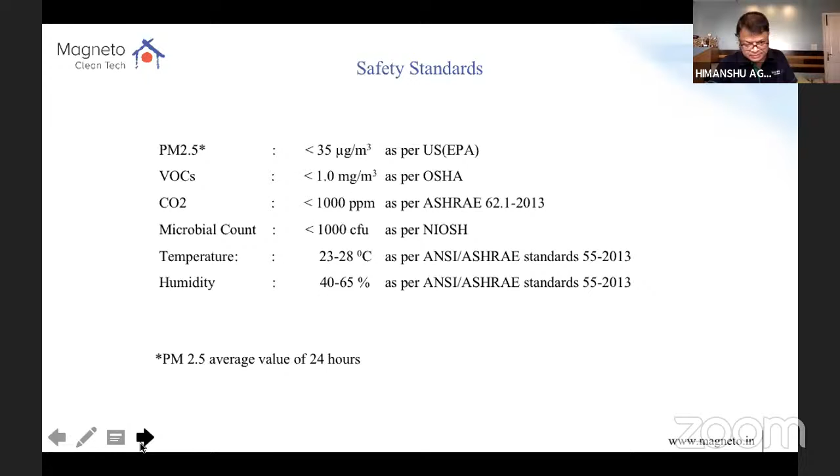So if you smoke one cigarette a day, and you smoke 365 a year, that's what your intake is. PM 2.5 average value, the 24-hour mean average value of 35 as per US EPA, is considered safe. The rest of the things, I'm sure you people would have looked at it. I'm trying to rush through very quickly so that we're able to finish in time and I can pass on the maximum amount of information.

Now there is a paradigm shift in the IAQ perspective. Earlier, IAQ was all about health, it was not about safety. But now, looking at it, I think safety has become the prime area. Prior to COVID, it was comfort and health. After COVID, it is safety and health.

PM 2.5 was the main concern. Of course, PM1 is rising, yet there are no safety standards for it. But yes, it's a very important aspect which will be coming to our doorstep very soon. Now bioaerosols are becoming a concerned area.

Now, when we look at the entire green building movement, it was all about sustainability, planet, energy, environment. It's a given, we have to do it, there's no passing by. Now it is shifting from planet to people. It is all about wellness and safety.

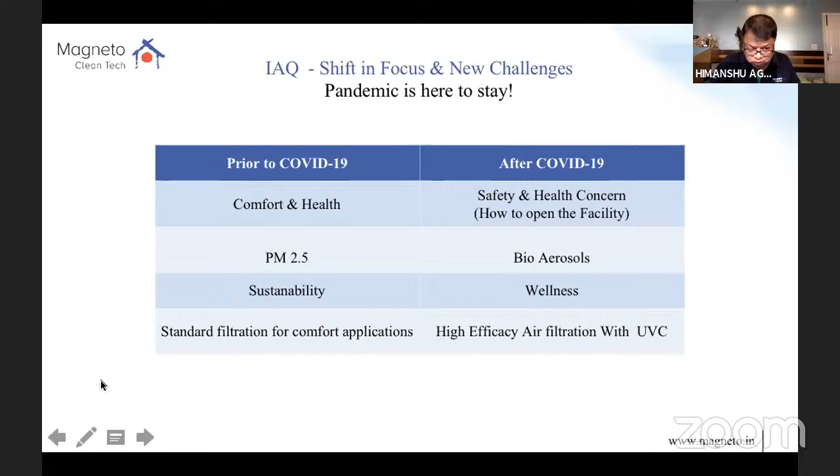Earlier, it was all about standard filtration for comfort applications. But now it is coming up with high efficiency air filtration, with all kinds of systems integrated with it to bring about more safety for you. So I would like to run through a lot of the technologies available here so I can pass on the maximum amount of knowledge.

In filtration, as my colleague Jayant already said, there are MERV, ISO, and EN standards. But remember, usually media-type filters have high pressure drop, high recurring cost, and in the context of India, they may become a secondary source of infection, because now you have all kinds of contaminants sitting right there, and they can become a likely contaminant source. Not 100%, but they can.

UV light, which was earlier used for healthcare sanitization, is now coming into our doorway every day, but it's becoming only marginally effective on moving air and has limited coverage area. In our lives, we now have portable air purifiers coming in with limited application, and they can again be a secondary source of infection if they just have a standard media filter.

Recently, more upcoming technologies are photocatalytic oxidation, whereby you break the bond of the VOCs through a catalyst, but there are certain safety concerns. These were basically the passive states, meaning the air comes in, gets cleaned, and comes in contact with the air pollutant.

Then there have been a series of active air purification technologies, which includes cold plasma, said to be a new age air purification and a fourth state of matter. It is very effective in reducing mild malodor and some gaseous states.

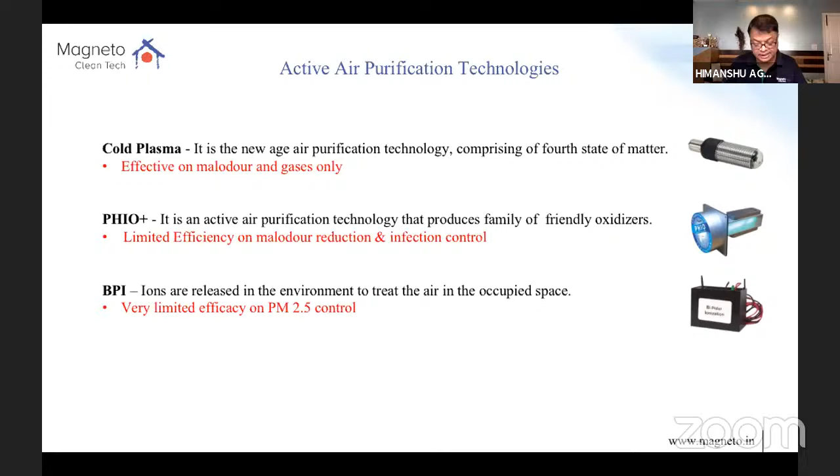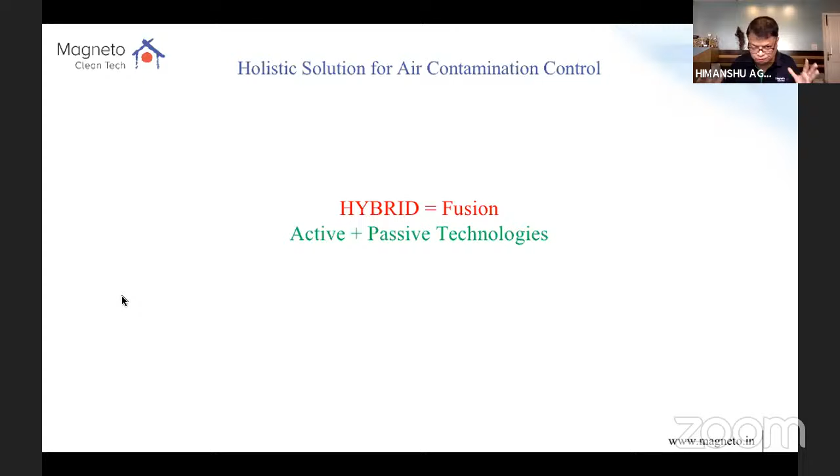So what I'm trying to tell you here is there are technologies available right out there, but as I said, there is no single bullet which can take them all. So that's where we see the right way approach is a holistic solution, which is hybrid. That means you need to fuse active with passive technologies to give you a complete control of what you want.

That's where we are born. So I'm a CEO of a startup company, Magneto Cleantech. I've been in HVAC industry for over 40 years, served as a technical committee member with the IGBC code, and I have seen what the India-centric problems are. So one, in India, we are focused on large-scale air pollution problem solving.

Second, we invented Magneto Central Air Cleaner, which is a filterless magnetic air purification process, which attaches to all kind of air conditioning systems, all kind of heating systems, all kind of ventilation systems.

And the best of it, what the user wants at the end of the day is not technology, it's performance. Performance on the real-time basis is only possible when you are able to provide certified clean air in the real-time display backed by data analytics.

Because one of the very important aspects of the air is why your indoor air is 15 to 20 times more polluted than outdoor. Because there is something called self-created air pollution. Ignorantly, we are doing all kind of activities indoor without realizing that we are adding more pollutants into the indoor space.

And that's why knowing these sources is equally important, because it's not just about technology. On one side, you may have a great product, great technology installed. On the other side, you may have an indoor source of constant generation of a pollutant. How is that going to work? You'll never be able to achieve safety.

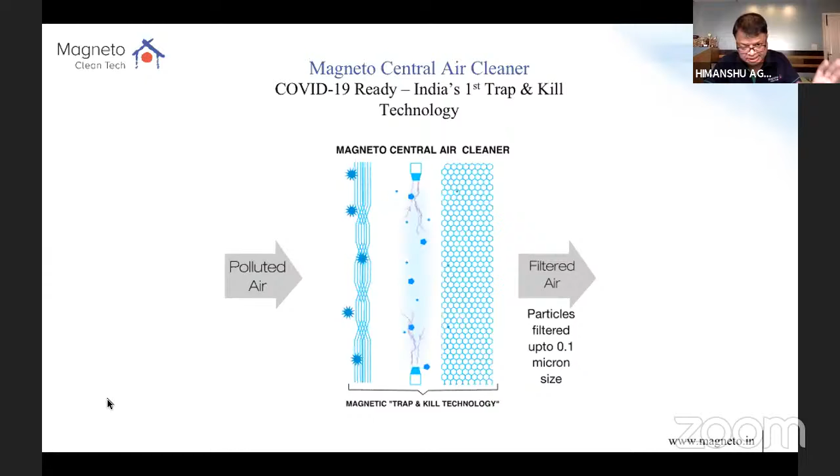So we invented coronavirus ready, India's first trap and kill technology called Magneto Central Air Cleaner. This is how it looks like. It attaches to all kind of air con machine. This is coronavirus advisory, this is a very important aspect.